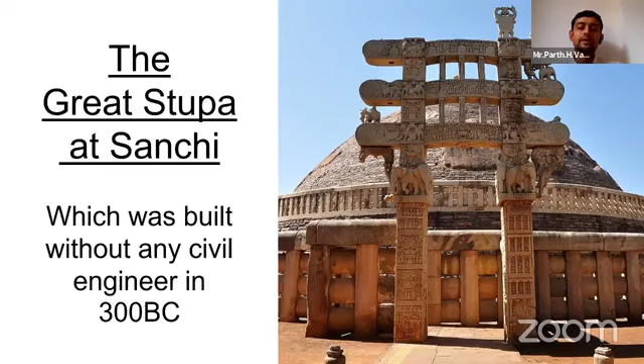But if we analyze, we cannot find even a 100-year-old building in our city. This is our just completed project, which we designed for 50 years, as today's buildings generally are. I'm sure it will not complete even the running 21st century, because we don't plan for it to stand more than 60 years, as the design life is 50 years. It will also require some maintenance; otherwise, early demolition may be required.

It happened in Vadodara also, that a 32-year-old building got a demolition order from our municipal corporation. There can be many reasons for that. One is leakage at the time of construction, and another can be irregular maintenance. Maintenance is so important. For example, if leakage is reaching the reinforcement of the building, corrosion will start, and if we don't stop it, it will slowly progress and demolish the structure earlier than designed. So that is also a very important part.

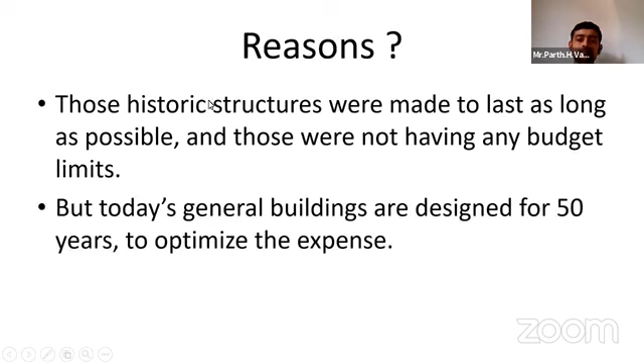So what is engineering? Basically, applying knowledge to give the best means for the requirement and situation. Like I informed, we build temporary structures like our site office, and sometimes we even build temporary structures for a few days. So we need to design according to requirement. We don't even require structural engineers for temporary structures.

At the other end, when we build a building like the one we just completed, we require structural design, even a structural stability certificate, meaning all types of authorized certification for the building life we design. Structural engineers also hold licenses from government authorities for this type of design.

Now let me come to the main topic, which is type of challenges engineers face in developing countries. Ours is a developing country. If we analyze, developing countries are on similar northern hemisphere weather, which is favorable for construction conditions, whereas in developed countries weather and construction conditions are more harsh. So challenges are less for engineers of developing countries, but problems are different. As I said, budget is an issue, and another issue is we have provisions for construction which are not as strict as developed countries.

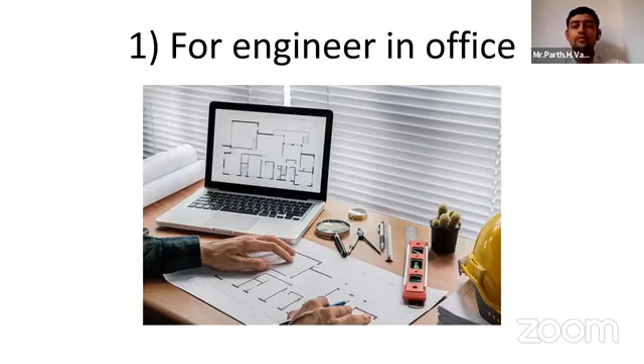First of all, challenges for engineers in office, other than field, is not part of my main topic. I am going to cover field challenges mainly, so we are not going deep into that topic. But those people also coordinate with non-technical people who don't have a study background as engineers, and to coordinate with them is also a little bit tough.

Let's go on to the main topic for engineers on site. Engineers on site have so many challenges, particularly in our country, which is developing. Let us go one by one. As I already mentioned, dealing with non-technical people for technical things. Let me go point by point.

First, let us take one example: removal of disturbed soil. Generally people think on site that we should lay footing on the same level. These excavators are very large, and even the dent of this excavator is 4 to 5 inches in length. So while excavating, you can see at least 2 to 3 inch variation if the driver is very experienced. So generally on site, what happens?

People excavate, and after that check the level. In case of 2-3 inch variation, they refill that soil to make the level same, which is a perfectly wrong practice. We need to remove just the disturbed soil, because construction on disturbed soil may cause settlement. At the time of differential settlement, where one footing is on disturbed soil and one is on undisturbed soil, the settlement will be different. In that case, structure may have extra stress which it was not designed for, which may cause problems in the long term, and sometimes in a short period also.

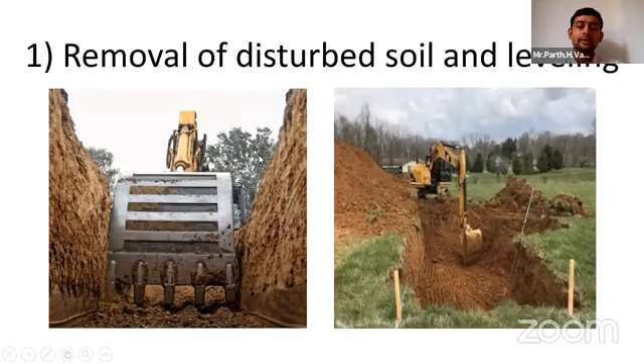So how should one footing be done in a particular method? Another slide shows different levels of soil footings, just as an example. This shows a difference of level of approximately 2 to 3 feet, but we can make this difference for 2 to 3 inches or 6 inches. Generally, people on site don't go for that difference of level. The reason is they need to calculate steel cutting length, bending length, and grading of different length bars, which is very difficult to manage. So to avoid that difficulty, they avoid these different level footings, which is a wrong practice.

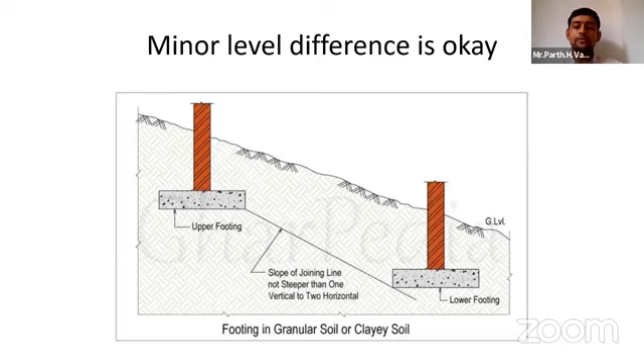We have non-destructive tests, like ultrasonic wave and rebound hammer, by which we can figure out to some extent the strength of concrete on site after casting, meaning after final setting time is over. But the main thing is, at the time of construction we should know how to make concrete and what criteria gives the best, optimum result. With the best content of cement we should give the best concrete strength result, which is the mix design concept. We have one IS code for that, IS 10262, which is the mix design code.

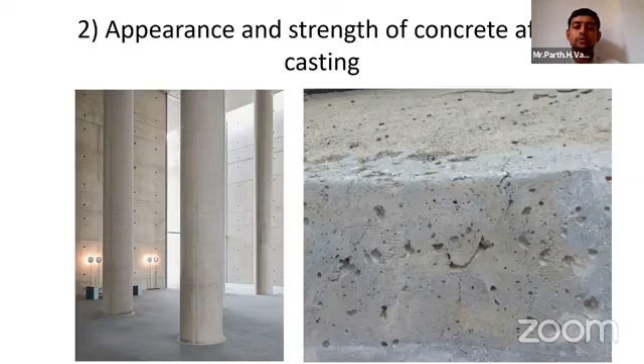How to maintain strength of concrete in that situation? So generally the photo is there. We have situation on site like that where only illiterate people are making concrete, and very rare time engineer is available on that place to maintain the things.

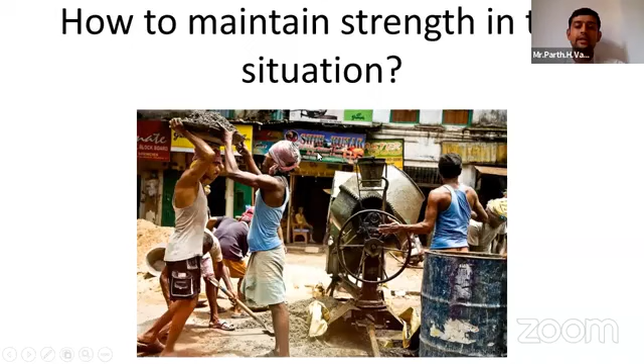Even the problem is there, to make work easier they change the water cement ratio, which is the main thing for the concrete to get strength. By adding more water, workability increases, and working gets easier for laborers, and that's why they used to do that, and that is in their practice. So engineer at site should know what is proper, then only they can restrict them doing the wrong practice.

First of all, we need to know what should be, then we can make people follow the standards. So first of all, we should understand the standards, and for that, we should understand what is concrete. If we understand what is concrete, then only we can make the proper concrete.

First of all, concrete is a void filling mechanism. Maximum size of aggregate is 20 mm in concrete, in general concrete I am saying, not in particular structures like dams, where aggregate size may go higher up to 60 mm. In normal concrete, which is regularly used, 20 mm is maximum aggregate size.

So 20 mm aggregates are there in a bucket, then some voids are also there, and those voids are filled by 10 mm aggregates, and voids of 10 mm aggregates are filled with sand. Voids of sand are filled with cement, and voids of cement are generally filled with water when we make concrete.

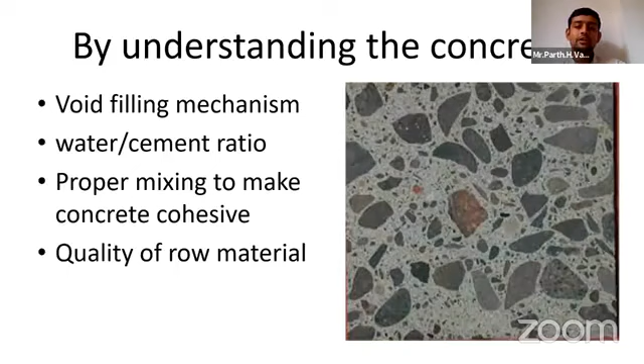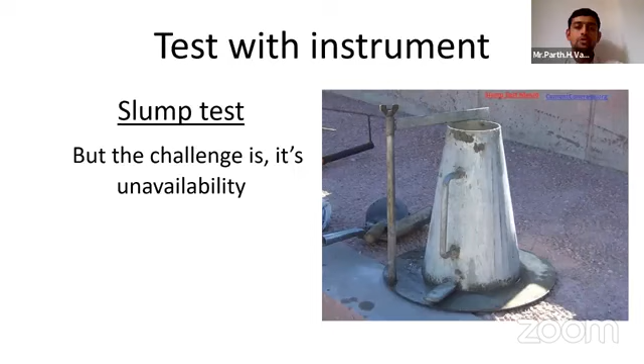This one is the slump test instrument. For fresh concrete, this is the only test with an instrument to figure out perfect concrete, which is the slump test. I am not going deep into the slump test, as it is already available in many sources. You can even find it on YouTube by searching slump test, and codes are also available to understand it. The main problem on site is that in most cases, we don't have this slump test instrument available on site.

So what is the solution for that? Experience with the instrument, meaning if you have experience of a few years, or multiple concreting sessions on site and multiple slump tests, then you can understand through comparison with the slump test, the appearance of the concrete, and the mixing time, what a proper concrete mix looks like. For that experience, you should have worked with the instrument on site.

I already have that experience, so I can judge the concrete after mixing, when it comes to the pouring location. Many people are there, even engineers, but there are also people who are not engineers but know how the concrete should be, and they can judge the concrete on site at the time of pouring.

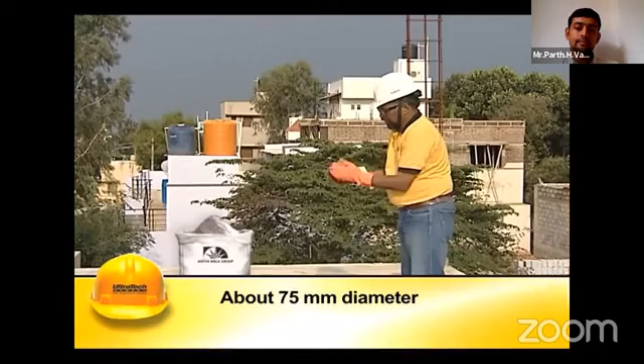We should take a little sample of the concrete, and as shown in this video, take it in hand and make a ball of that fresh concrete. If it is not making a ball like this, then the concrete proportion is not proper, or some problem is there. Most of the time, segregation or high water-cement ratio is the problem in that case.

If we cannot make a ball from the fresh concrete, that's a problem. After forming the ball, we should take it in hand and throw it up to 6 to 8 inches of height, and it should remain as it is, as shown in the video. If any crack appears, or segregation, or any aggregate segregates out from the ball, then the concrete mix is not proper, meaning the concrete is not cohesive.

This shows that if the concrete is not proper, these types of cracks and segregation can come out. So the shown ball is not proper cohesive concrete. And if the concrete looks even worse than this, there's more of a problem. We can even say that our mixing is not proper, meaning the ratio of the aggregates is not correct.

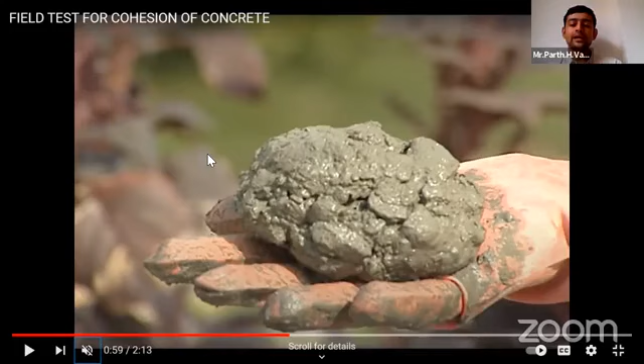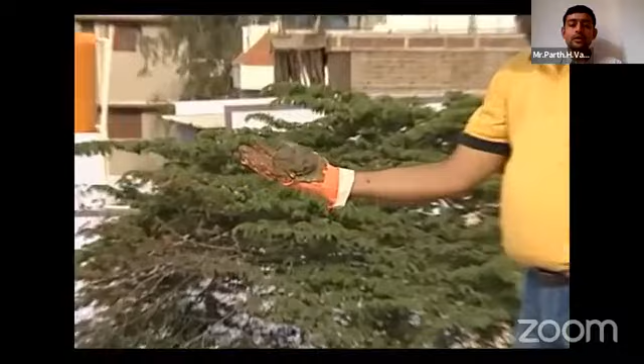Then for another test, if we throw it from around 2 feet of height, it should have cracks. Last time I said it should not have cracks, but this time it should have cracks, as we increase the height from 6-8 inches to 1.5-2 feet. If it cracks like this with minor cracks, then the concrete is cohesive.

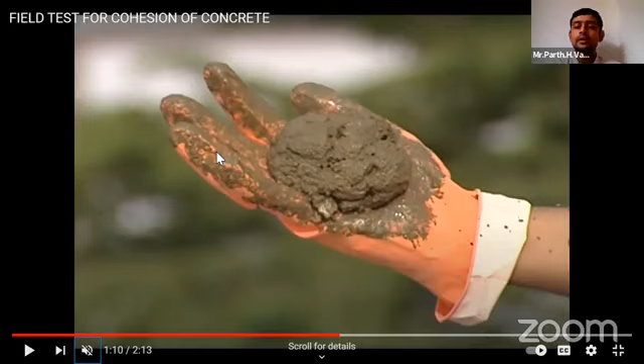This test is particularly for cracking, meaning if we check only one thing, it is not enough. The other height test, up to 1.5 to 2 feet, is also important, because the ball could remain as it is in the first case, yet the concrete may not be cohesive and have less water content than required. So this test checks for that. The first test shows if the water is higher than needed, and the second shows if water is lower than needed. After both tests, we can say the water and aggregate proportions are okay.

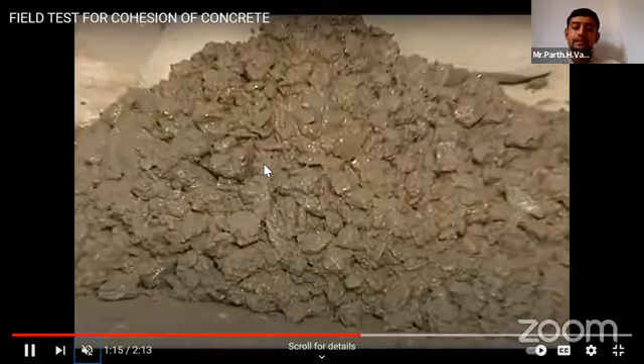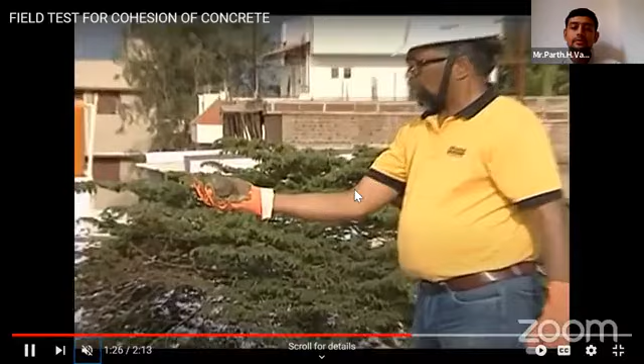So this is a test which doesn't require any instrument at site. Generally concrete looks like this, where you can see no segregation. This is the first test at around 6 to 8 inches height, and this is the second one at 1.5 to 2 feet of height.

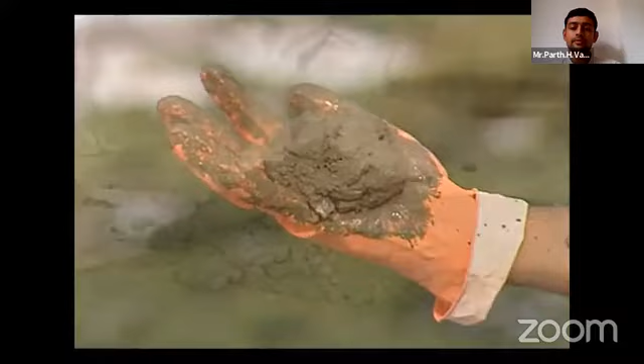Let us move to our main slide again. Okay, so the next point is curing.

You can see 4 photos in the slide. First is ponding, which is the right method, but the problem is that generally we are in a hurry to get ahead in the construction schedule because of deadlines. So labor cannot work well in this type of ponding, as they face difficulties working in that water. So they avoid keeping the water, even though we want that ponding for strength. That's when issues occur.

The second method is something generally done in developed countries: spraying a chemical to lock the existing water in the concrete, which is one type of curing. People generally think that adding extra water is the only type of curing, but that's not true.

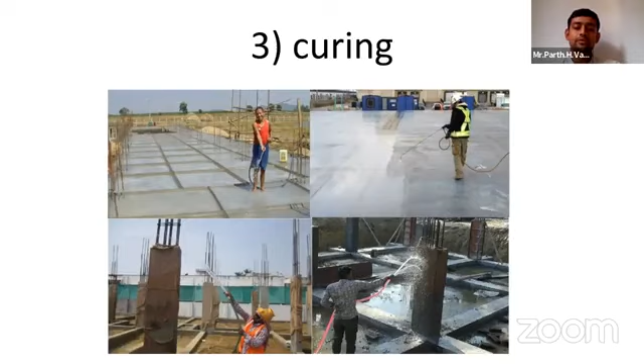So the proper method is the one in the third photo, where one person is pouring water and the cloth is wrapped on the column, which will keep the moisture for the long term. But the problem is that this method is also rarely seen on general construction sites, because workers want to work further on that area, and this covering makes problems for them. Some people who don't have an engineering background avoid it, as they think doing and maintaining those things is a waste of money, which is not true.

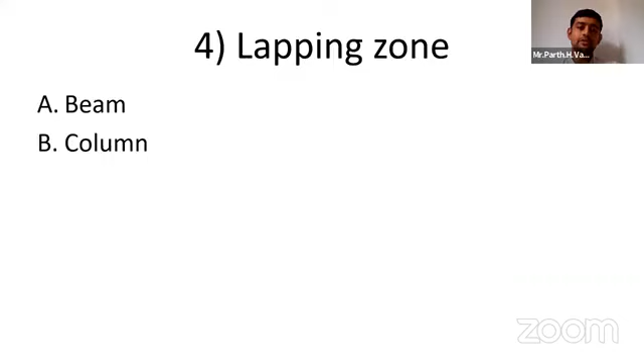Let me come again to a structural point, where some things are lacking and people make mistakes. That is the lapping zone. Generally, steel comes in a length of 40 feet. So we don't have the perfect size on site, and we sometimes have some wastage of steel. To avoid that wastage, people try to lap the steel. I'm saying this in the case of beams, not columns, because columns don't have any option. I will come to that point later on. So in the beam, the lapping zone has some limitations. The next slide is regarding that.

This is showing the bending moment diagram of a fixed beam. Actually, I can say it is a beam with end supports and restraint at the ends of the beam for moment. These types of beams are there in regular structures. Other beams which you learn in college are not in regular practice. One other is the cantilever, which is in regular practice, but cantilevers are not allowed to have lapping in the top reinforcement, which is always mentioned in the structural drawing. So studying the drawing with the instructions shown in it is very important before execution of the work.

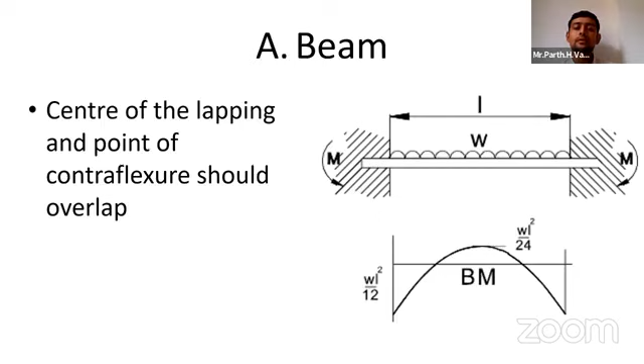So the center of the lapping and the point of contraflexure should overlap. How lapping should be done is written over there. So what is the point of contraflexure? The point of contraflexure is the point where the bending moment is zero. As you can see in this bending moment diagram, where the level of the beam and the bending moment diagram overlap, this point which I am showing with the cursor and the similar point here are both points of contraflexure. So the center of the lap and the point of contraflexure should overlap. This should happen in the portion where tension is there. I think that deep design part is not in the diploma syllabus, so I am not going much deeper into that.

In the case of columns, we have very limited space for overlapping, and in columns we definitely cannot go ahead without lapping, which may occur in beams. So if h is the height from beam top to next beam bottom, and beam top is definitely slab top in any case, because beam and slab are always combined in general structures. So beam top to next beam bottom is the height, which we call h. Then leaving h/4 at both ends, the remaining h/2 height is the lapping zone. And lapping should not be in a single layer, which I will show in another slide.

So in lapping, the first photo here is showing improper lapping, as all the laps are at the same place, which is not proper practice, as that portion becomes a weaker portion. Laps should be like this, alternate, meaning staggered lapping, due to which some continuous steel goes there, so that no particular portion becomes weak.

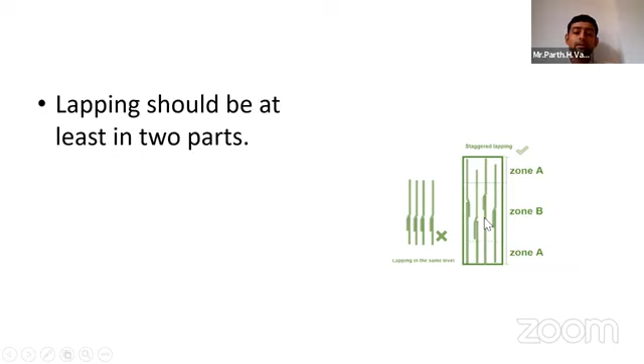On general sites, the wrong practice occurs that the lower h/4 or h/2 has most of the laps, as a worker can just add another steel bar while standing there. Sometimes that happens to avoid wastage. Actually that is not wastage, that is utilization of the steel. And we can plan from the beginning to avoid wastage, and we can get the best results.

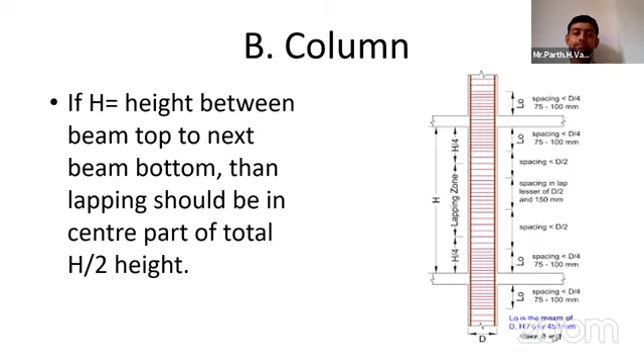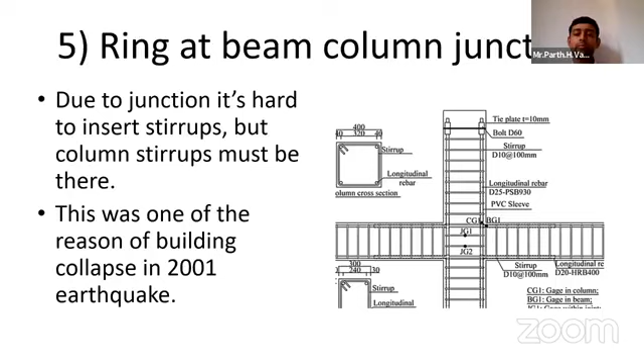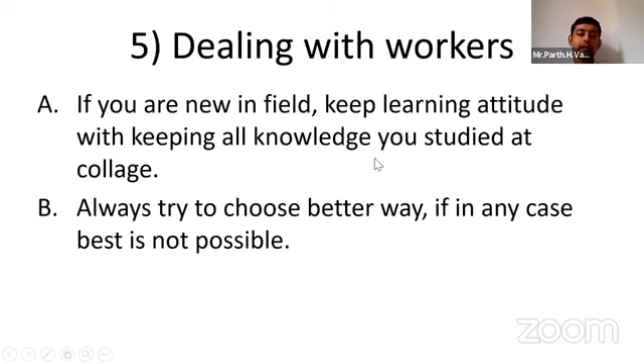My main topic is over now. Other topics regarding RCC frame structure buildings which I have experience of, I am just going through the headings only. One is plumbing. In that case, leakage problems and pressure problems occur. For example, if you don't have enough pressure in the toilet, then flushing can be a problem in case of flush cock or metropole type flushing devices. In flush tank type devices, that is not a problem.

Another is waterproofing. In waterproofing, why it is required, where it is required, and how it should be done are the main topics. If I say how, in short, water should not stagnate anywhere. So waterproofing should have sufficient slope so that if water comes on the waterproofing from anywhere, it should run away and drain out.

Another thing is wall cracks. Our general buildings have partition walls with a thickness of 5 to 6 inches with plaster. So they get cracks most of the time. The reason for a crack is very important for the solution of the crack. Another is tiles and stonework: different types of tiles and stones. There are different methods and different types of binding materials other than cement as well.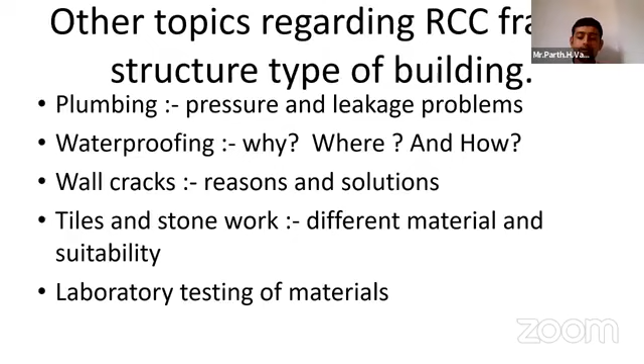And the last is laboratory testing of materials. All materials have some specifications and we can test them in a laboratory. Most of the time finishing materials are not tested in the laboratory on general sites, and that is not much required either. And I don't have experience of finishing material testing in the laboratory.

And at last, if we are there, then the work will go ahead. So the importance of the helmet and safety of an engineer at site is also very important. Even the safety of labor is important. So one should know the importance of their safety. I can say that you should understand your safety first, then you can say it to others.